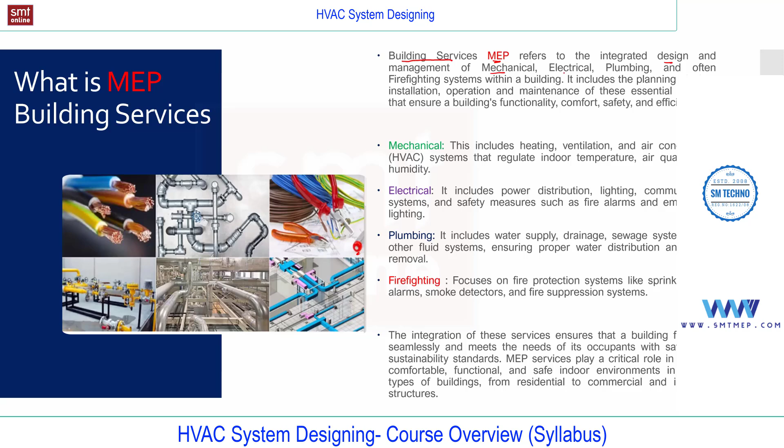So I'm going to share the screen. You can read MEP here. In short, we used to call MEP - mechanical, electrical, and plumbing - or I can call it building services. If you talk about MEP, you can find it on the screen also. This building services, in short we call MEP, refers to the integrated design and management of mechanical, electrical, plumbing, and also the firefighting system. It includes the planning, design, installation, operation, and maintenance of this essential system to ensure the building's functionality, comfort, safety, and efficiency. For example, a building without electricity, or just visualize a building without a plumbing system - there's no use of the building. So these services are very important for the building. In short, we used to call it MEP.

It's a building services, and under this you'll find four services. One is mechanical. Under mechanical, you'll find HVAC. In short, we used to call it HVAC - heating, ventilating, and air conditioning. So under mechanical, you'll find HVAC, and E is for electrical service.

Under electrical, you'll find lighting, power, and alarm, emergency lights, etc. Then P stands for plumbing. So in plumbing, you'll find water system, drainage system, fixtures, lot of things. So altogether, we used to call this MEP.

So total four services combined together. In short, in actual practice, we used to call it MEP or building services. So now listen, this is important. If you're learning this HVAC, it means you are learning a part of MEP. And as a mechanical engineer, it is recommended to start with the HVAC, and for electrical, it is recommended to start with electrical.

Later, electrical people also get involved in mechanical services, and even mechanical engineers also get involved in electrical services, for coordination. The reason is all these services are for the building. So the electrical engineer must coordinate with the mechanical engineers, and the mechanical service engineers must coordinate with the electrical, and all this is linked with the architect. Who is the architect and how the process goes in actual practice, we'll discuss in chapter 2.

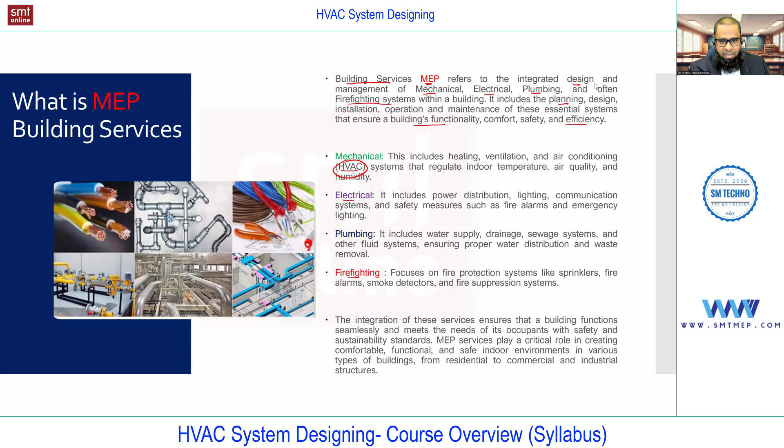So in the next slide, you'll find information related to HVAC. HVAC, in short, we used to call HVAC - it's heating, ventilating, and air conditioning. And if you talk about HVAC, you'll find different societies like ASHRAE, ISHRAE, and you'll find carrier, you'll find SMACNA, and a number of options. When we start the course, we'll talk about these standards also. HVAC stands for heating, ventilating, and air conditioning.

And this is used for what? To control the indoor environment conditions. At this level, I'm just giving the general information. In detail, we'll discuss in chapter 1. We'll start with the definition of air conditioning. So at this level, just I'm giving a quick idea.

So HVAC stands for heating, ventilating, and air conditioning. It refers to the technology and systems used to control indoor air environment or conditions, including temperature. So we are maintaining some parameters that include temperature, humidity, air quality. Under air quality, you'll find velocity, distribution of air, noise level, etc. You'll find a number of parameters that we'll discuss in chapter 1. This is just an introduction for various buildings and structures.

And this HVAC is not only for residential - this HVAC system is for residential, for commercial, and no doubt for industrial. And not only for human comfort, this is also for process control. So you'll find n number of applications for this air conditioning. Just for example, you'll find this air conditioning in residential projects or in commercial projects, as well as in industrial, and especially in process control also you'll find this HVAC.

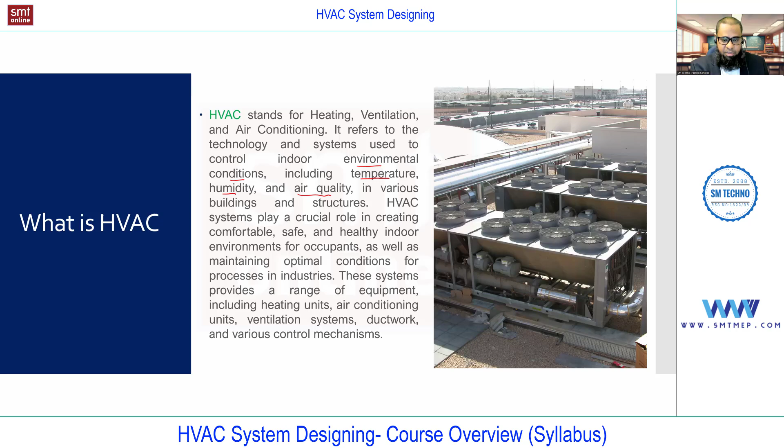So as I said at the beginning, in this session, you're going to learn what you're going to learn in this training program. Okay, so I'll give you a brief idea about the syllabus.

Chapter 3 is very technical and very interesting. In that you are going to learn physics used in HVAC, very basic concepts like what is heat, what is BTU (British thermal unit), the unit of refrigeration, nothing but ton, and what is the temperature scale, enthalpy, sensible and latent heat, which is very important at the time of load calculation. Because at the time of load calculation, when we talk about extracting the heat gain from different sources, that source can be only sensible or it can be sensible plus latent. So this terminology, these terms, this concept is very, very important to understand the concept of designing, including the vapor compression cycle, because commercial systems work on the vapor compression cycle.

You'll find vapor absorption cycle also, but it's not commonly used in actual practice. You'll find this vapor absorption cycle used for industrial purposes. But if you talk about residential and commercial equipment related to HVAC, you'll find that it works on the vapor compression cycle.

We'll also talk about units and conversion, which is again important for a beginner, because in some countries you'll find the English system and in some you'll find the metric system. English system is like feet, inches; metric system is like mm, degree centigrade, etc. So this unit conversion and system of measurement is also important.

Next, chapter 4 is for psychrometry. Without psychrometry, it is not possible to deal with designing an air conditioning system, because psychrometry is the property of moist air. If you don't know the properties of moist air, you cannot think to condition the air. So in chapter 4, you'll get information related to psychrometry, different properties of air, and how to use the psychrometric chart and software.

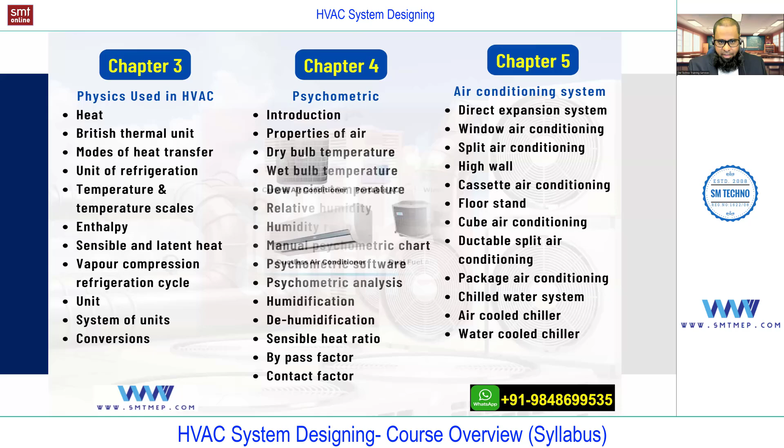Next, part 2 - you see this part 1, chapter 5, continuing all the systems, as I said, this DX system, chill water, as well as all air conditioning system. Next, if you talk about part 2 of module 1, we'll talk about this manual load calculation.

Manual cooling as well as heating load calculation, which is very interesting, important, and bit lengthy also. Part 2, I'm considering this - manual load calculation, cooling as well as heating. This is interesting, and at the same time bit lengthy and very, very important.

Without this manual load calculation, you cannot think to deal with software load calculation, because in manual load calculation you're going to get the concept. And with the concept only, you can provide the correct input at the time of using the software, say HAP software, for example, as per the syllabus, because software will provide you the result based on the user input.

If you provide the correct input, you'll get the correct result. If you provide the wrong input, you'll get the wrong result. Giving the input in software requires the concept, and the concept for load calculation you're going to get in the manual load calculation. So this is very, very important and lengthy.

We start with chapter 6, and chapter 6 is building survey. In building survey, we are going to learn what information needs to be extracted to prepare the input file to start the load calculation. So we'll find a number of parameters to discuss in building survey, like latitude, longitude, psychrometric condition, elevation, levels, construction material for finding the U value, reading the architectural layout, extracting door information, window information, metal used in construction, to calculate the actual heat gain, etc.

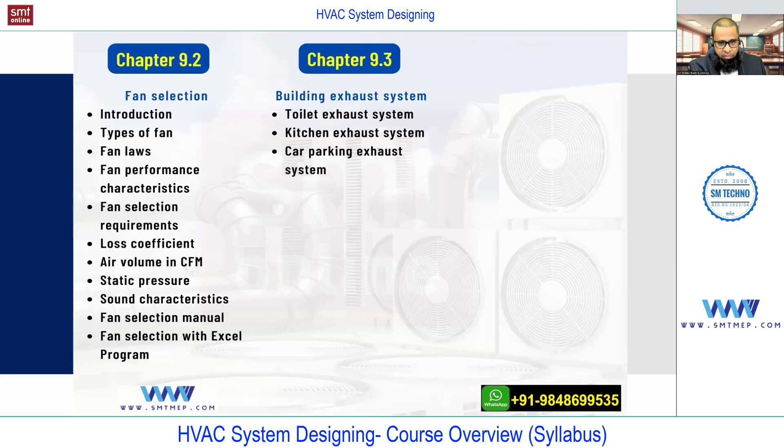Now, if you talk about part 5 of module 1, I'm considering water side, water system. Water system means I'm talking about the chill water side. It can be for air cooled chiller or it can be for water cooled chiller. So different types of pipe, different material, then the arrangement like direct return system or reverse return system.

Then no doubt, pipe designing. Again in pipe designing, first we'll deal with the manual chart from ASHRAE or from Carrier. The end result is going to be same. Then the same example, I'll proceed with the pipe sizer. Most commonly in actual practice, you'll find McQuay pipe sizer. Then we have different methods for pipe sizing like velocity method or ASHRAE method, velocity plus friction, etc.

So in chapter 11 of part 5, you will find fittings and accessories. Different fitting, different accessories, which is very, very important for interview point of view. We used to call it valve package, or we can also call it hookups. Again, this chapter 11 is important for the pump selection.

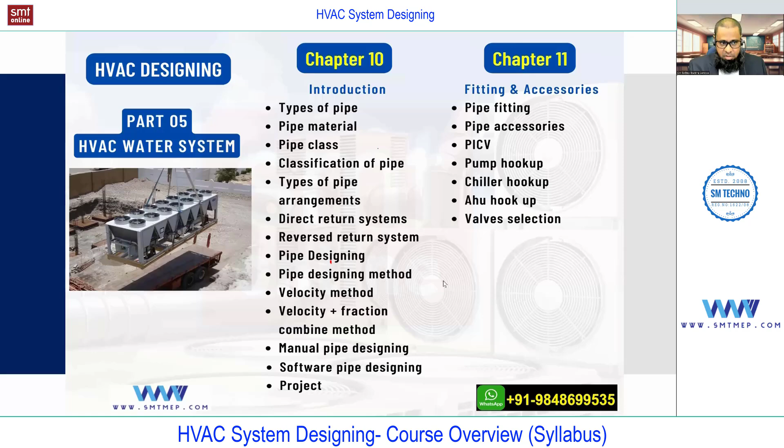So this pump selection also I'm considering in part 5. Different types of pump, different pump laws, then how to design or how to select this pump, how to find out the head calculation with an example, with a sample project.

Again in pump selection, first we'll deal with the manual calculation, then the same using Excel program, because in actual practice to save time we are using Excel program. So once you know the concept in manual, using Excel is going to be simple for primary pump, for secondary pump, or the different systems like primary only system or primary plus secondary, or you may find primary plus secondary plus tertiary.

So you'll find the different system related to pump. All about pump selection, different types of system related to pump, you'll find in part 5 under chapter 12. And chapter 12.1, which is also a part of part 5, you'll find the cooling tower selection, makeup water tank, expansion tank, air separator, etc.

Okay, so this cooling tower is for water cooled chiller. Makeup tank, again water cooled chiller, even for air cooled side also, but limited capacity. Then expansion tank sizing, again is for both the chillers, air separator, etc. So this I'm considering as an advanced topic that also you'll find in part 5 of module 1.

Okay, so these are the total 5 parts of module 1, which comes under designing. So module 1 I'm considering as HVAC designing. Okay, so the major part of this training is this designing side.

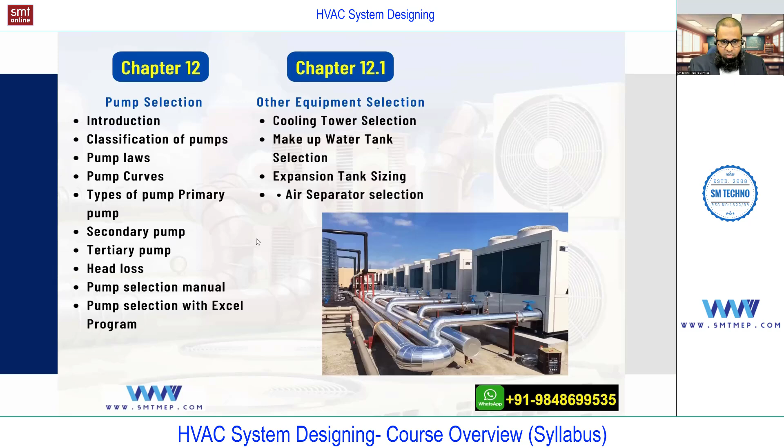So this is about module 1, HVAC designing. Next, if you talk about module 2, I'm considering part 1 and 2 in module 2. Part 1 is AutoCAD, how to draw, and part 2 is HVAC drafting, what to draw.

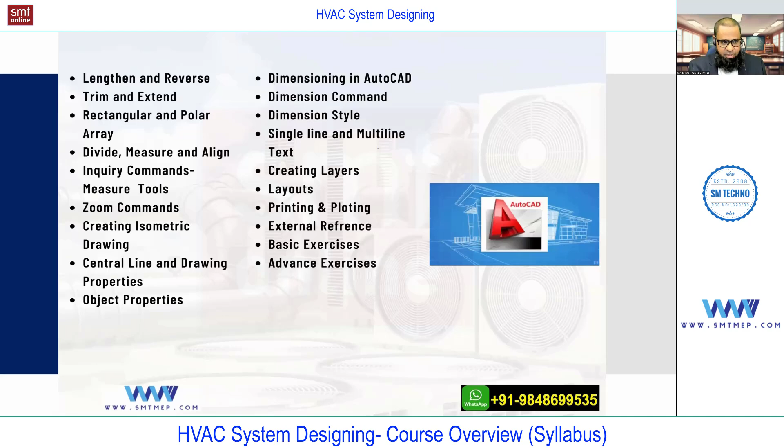Okay, so you can read all this topic. I'll share you this presentation after the session. You can spend some time and read all the topics so that you'll get the idea what topics you're going to get in this.

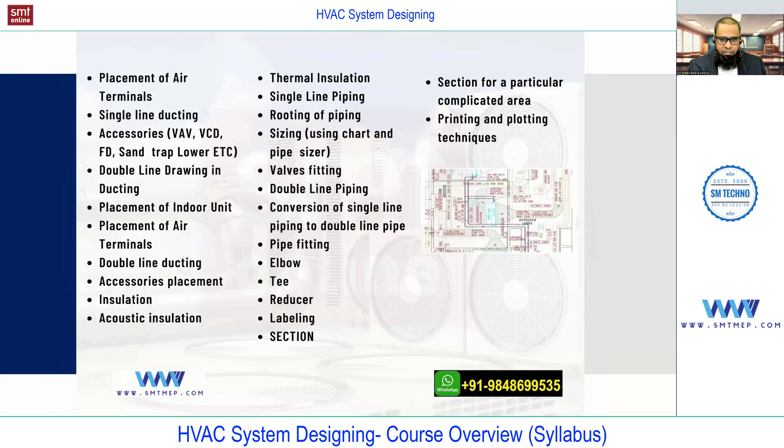Next, module 3, I'm considering as HVAC estimation by Mr. Habib. He works as HVAC estimation engineer in Kuwait, and he will cover this tower project, and that too in video. This estimation also covers the complete project, a tower project, a total of 24 floors.

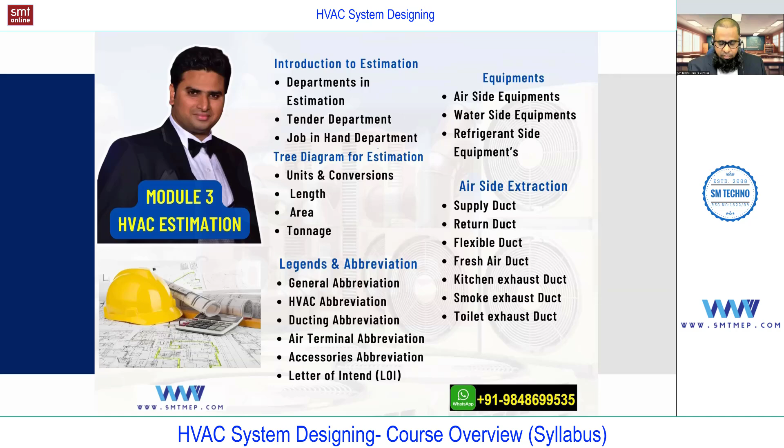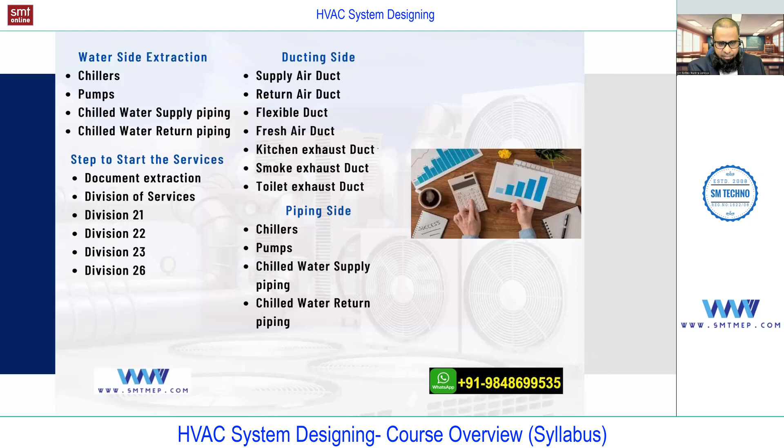In this you'll also find the notes, data, including that project file in the DWG format with the design reviews. So you can go through once all these topics. After the session, I'll share you this presentation. In this estimation you'll also find the air side extraction, water side extraction, and different system equipments.

Etc. Next, module 4, I'm considering HVAC installation. In the HVAC installation, you will find installation for chillers, installation for AHU, FCU, duct installation, pipe installation, pipe insulation, duct insulation, etc.

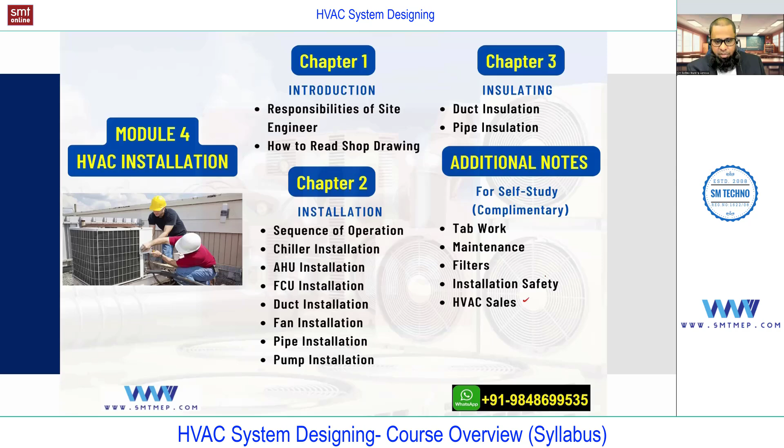Apart from this, you'll find some additional notes for self-study like tab work, maintenance, filters, safety, and sales. These are complementary self-study notes we'll provide with this training program. So you're going to get the complete package, which includes 4 modules.

Module 1 is a designing module. So it's a complete one package for this HVAC course. Find on the screen: module 1 is designing, which consists of 45 plus hours of live training.

Module 2 is HVAC drafting with AutoCAD, 16 hours plus complimentary. Module 3 is HVAC estimation, 10 plus hours, including the tower project. And module 4 is HVAC installation.

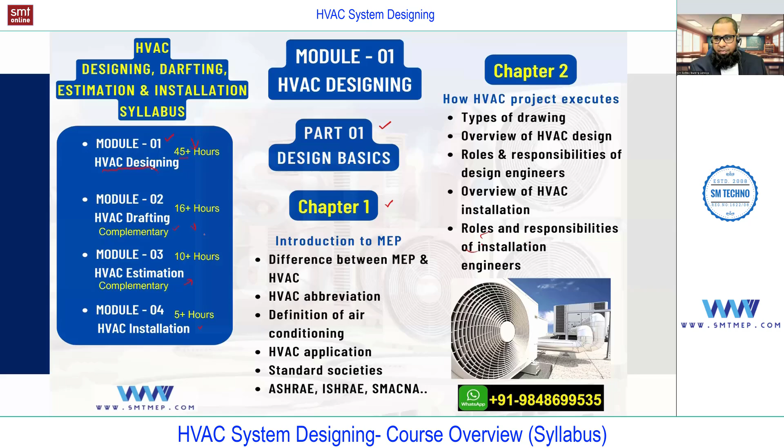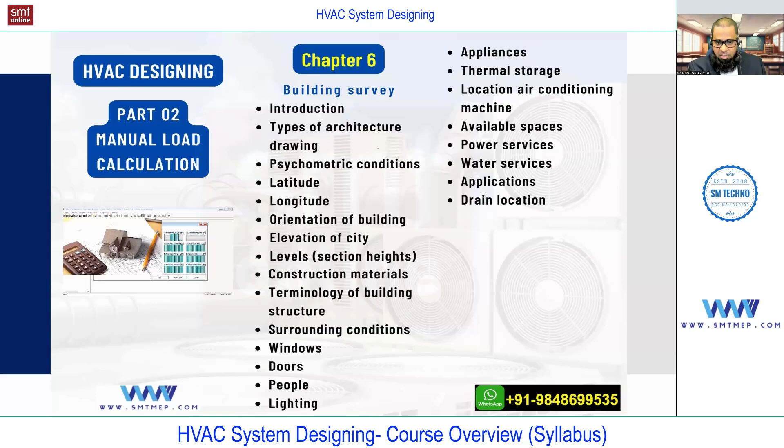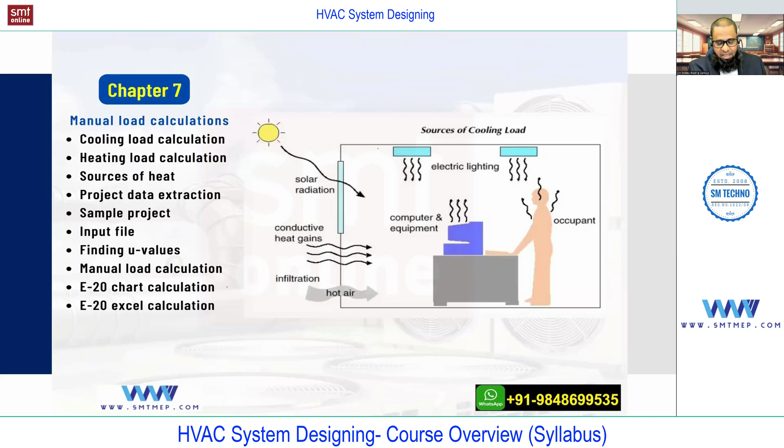So it's a complete package that includes designing, drafting with AutoCAD, estimation, and installation. If you're working on the design side, the installation knowledge will help. Or if you're working on the execution side, the design knowledge will help you take decisions. And if you're working in the estimation division, this estimation course is enough to start work as an estimation engineer. And no doubt the drafting will help for draftsmen.

But as an engineer, drafting will help you for extracting data at the time of load calculation and for minor changes as per requirement. Even as an engineer, you should know AutoCAD, but not like a draftsman, at least the basics. But I cover AutoCAD in detail, the 2D side, as well as the drafting part for air side as well as water side.

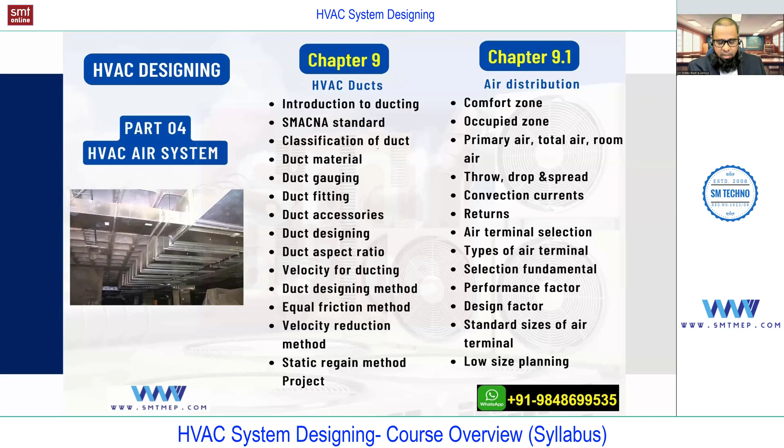So I'll share you this presentation, you can go through it once. We are offering this training from 2008. We are based in Hyderabad, India, and we are offering this live online from 2009, and video training from 2019.

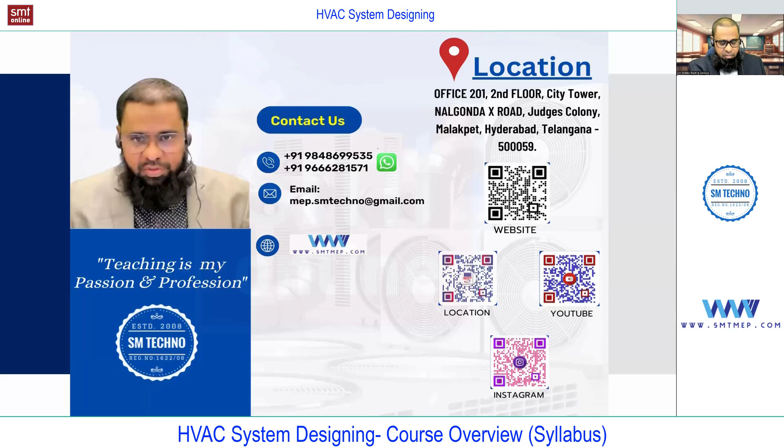And you see, people have confusion between MEP and Revit MEP also. So Revit MEP is an advanced software which works on the BIM concept from Autodesk to design building services. So if you know MEP, then you can think of Revit MEP, because Revit MEP is the next level. So as a mechanical engineer, if you know HVAC design, you can think to deal with Revit.

As electrical, if you know electrical design, then you can think to deal with Revit. But directly learning Revit is not at all recommended, and we will not offer that either. So if someone is asking for Revit, first we'll confirm whether they know the services or not. Revit MEP is a software from Autodesk that works on the BIM concept to design building services.

So if you know building services designing, then using the software called Revit, you'll be able to design the services. So at the time of learning Revit, you can focus on the software with the knowledge of these services. We are offering separate courses for this.

Course 1 is HVAC, course 2 is electrical, course 3 is plumbing, and course 4 is firefighting, then Revit MEP and Revit architecture. Revit architecture is for civil point of view. For mechanical and electrical, you can find these courses. So electrical is separate, and firefighting is a different course.

So what I'm talking about is HVAC, and this training program is for HVAC. Thank you, okay, fine.